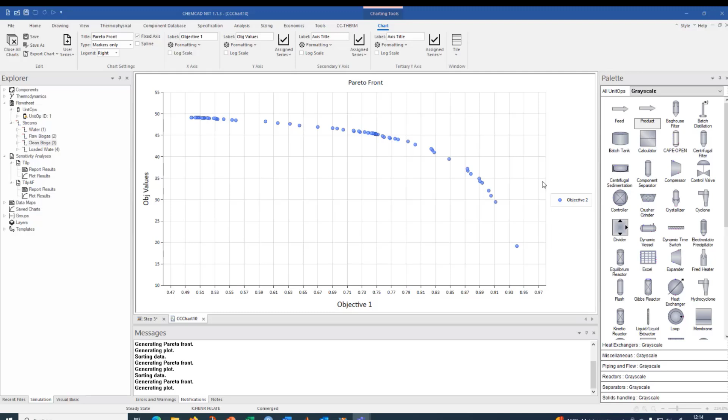So we see we can either reach a high concentration of methane in our clean biogas or a high amount of clean biogas, but not both. And furthermore, we cannot even reach the required specification for biomethane in order to feed it to the natural gas grid, which is at 98% over here. So what do we have to do?

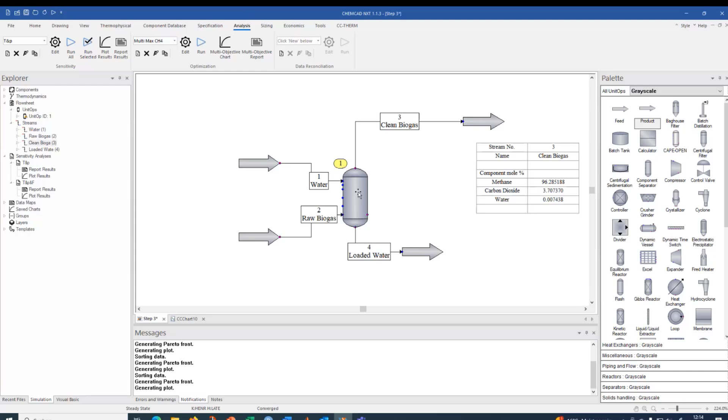Well, one simple equilibrium stage is not enough, so we have to use a scrubber column instead. We'll do this here, so we have to modify our flow sheet. I will remove the flash, so clicking on it, pressing delete, and it is gone. And I will select a different unit op which can help us here, which is the SCDS column. But I don't want to have a distillation column. So using the right click here on this, I can select at least the sketch of a simple scrubber column.

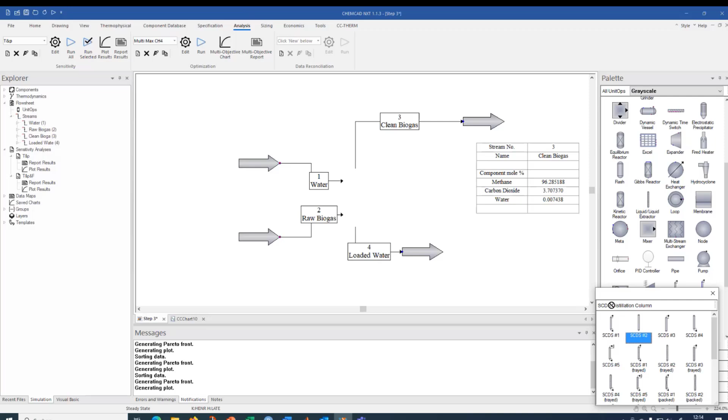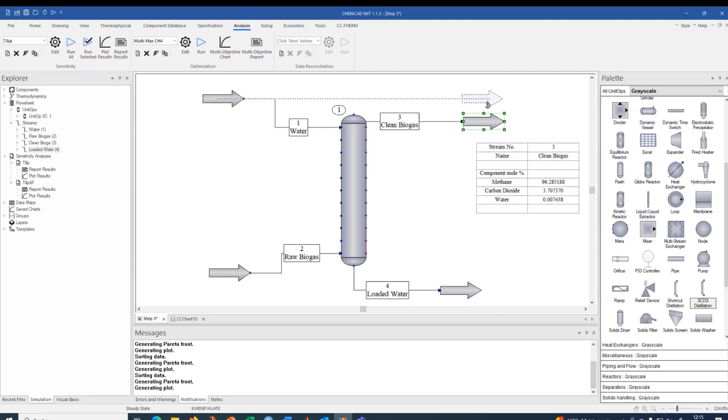I have to reorganize my streams a bit. So I reconnect everything again. And then the clean biogas has to be connected. And now I don't have just one single equilibrium stage, but here in this unit operation, I can put several equilibrium stages. So here I will work with a top pressure of 10 bar. Let's start with 10 stages.

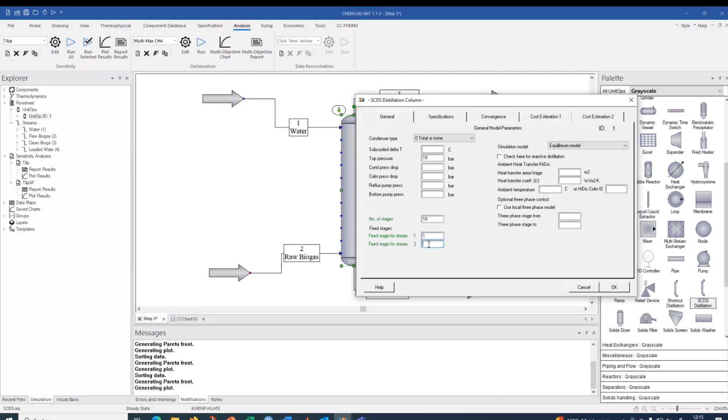The feed stage of stream 1, which is the water, goes to the top, which is stage 1, and the raw biogas goes to stage 10. Now we are running with the before optimal thing, so almost 110 cubic meters of water, having a temperature of 20 degrees Celsius now, and the pressure in the column is 10 bar.

So let's go back to the home screen. Be careful, don't press the run button here on this analysis screen. This might be confusing, but if you do this, the optimization will start again. So be sure to go back to the home screen, or instead you can also use the small run all button, which is here on the top line.

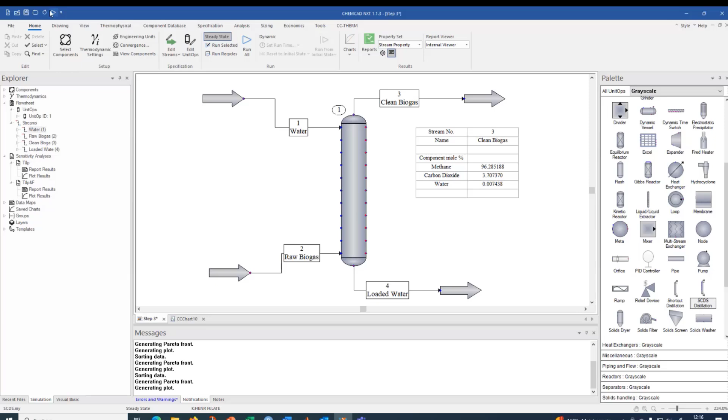So again, we can play with our parameters, but now we added an additional parameter. So what are our 4 parameters for optimization now? We have the amount of water. We have the temperature of the water, with which we control the temperature inside the column. We have the pressure on the column, and we have the number of stages in the column. So now we have 4 optimization parameters, and we can try to redo our optimization now.

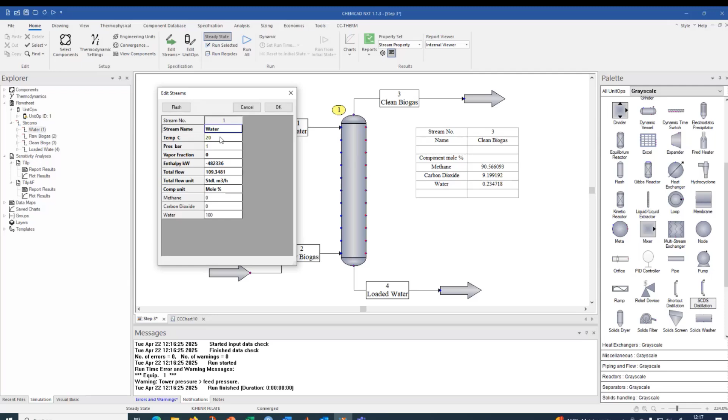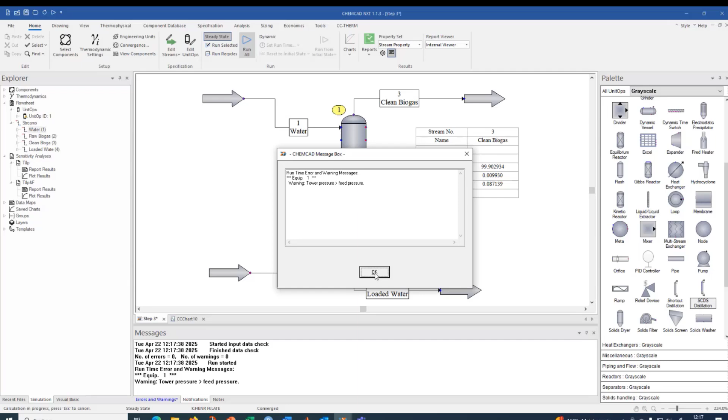But let's first see how we can reach these 98% of biomethane now. So I will play a bit with my parameters by hand. So I will reduce the temperature. Let's see what happens. With 5 degrees Celsius of our scrubbing water, now we easily reach the 98%. We even have 99.9%. So this is too much. So now we can try to reduce our other parameters.

We will have a look at how to optimize these, because finally in the optimization of a plant, it is important how much we have to pay for each parameter. So we have to pay for the water, of course, that we use for scrubbing. We have to pay for the temperature, because we will need some cooling machines to cool down the water. We will have to pay for the pressure, because we have to compress our biogas and, of course, to pump our water.

And we have to pay for the column itself, because the more theoretical stages I have inside, the higher the column will become. So these costs will also increase. We have to address these points. But with this scrubbing column, we can see that we can easily reach at least the requirements, 99.9% without any issue. So we can reduce some parameters to get the 98% of biomethane concentration. We can look into the column to see if it is sized well.

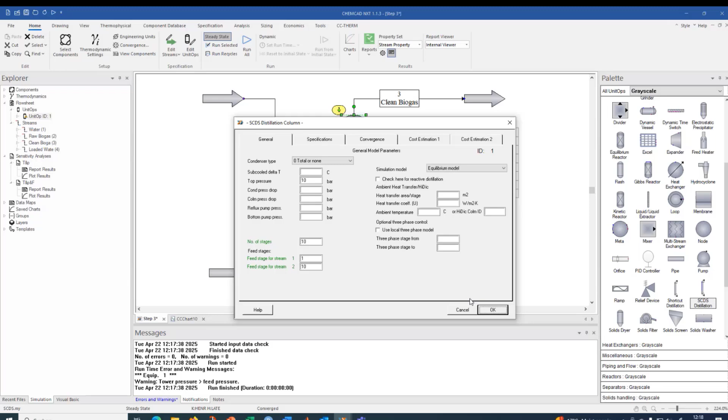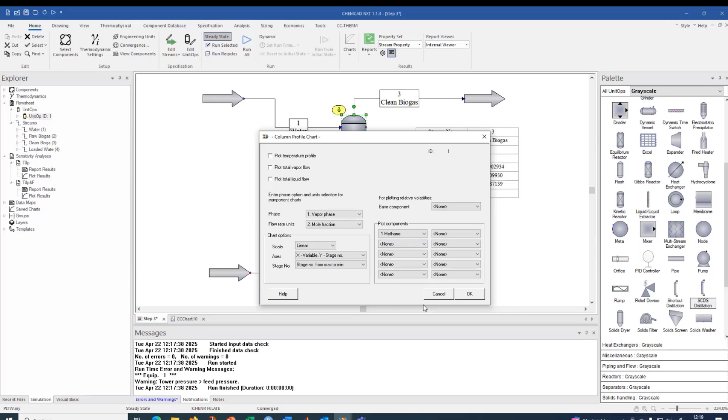So here are the results. With the right click, we can plot our profiles. So we can plot the column profile here. And I would like to see the vapor phase and the mole fraction of methane in our column, so we can see at which stage we reach our 98%. We can see this here, so this is where we enter, and this is the first equilibrium stage, so we enter with 50% of methane, and then the methane amount inside the column increases.

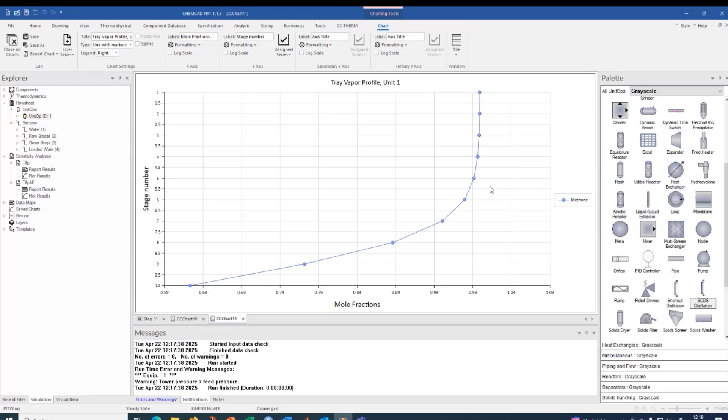And we see here, after around 5 stages, we have reached the 98%, 99%, and the additional stages that we have don't increase the methane concentration much. So from this point, I can see my column has sufficient stages. We can even reduce the number of stages to save some investment costs. We'll look at this economical optimization later. But these are the preliminary results, and we can find out, yes, we can produce biomethane in our plant.